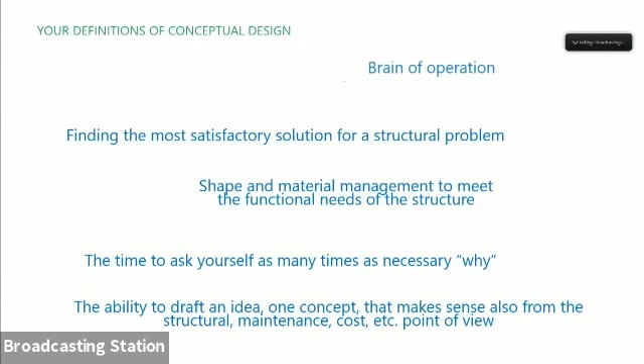Let me, on the indication of Aurelio also, talk a little bit about the definition of conceptual design. You will see here different definitions of conceptual design. When we started preparing the conference in Madrid, we had the idea to ask the possible participants for one definition of conceptual design. And we received more than 50.

They were very good, as you could see - you were not able to read them all. Now you have some of them on the screen, and they were very, very good definitions. Conceptual design is not a unique process. It's a personal process - each one has different ways to approach this process.

For that reason, we have different definitions. But if you read carefully, you'll see all the definitions use one common word: creativity. We are creative persons. We need to use our creativity to do better.

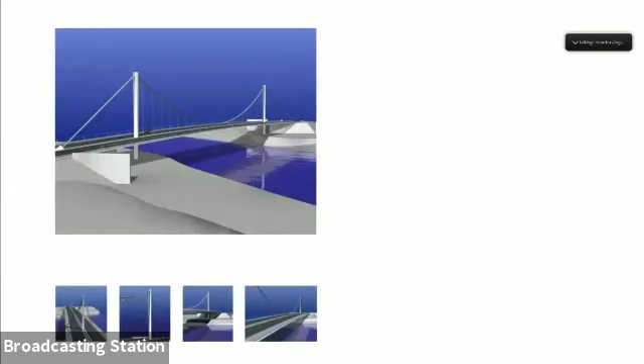So I will go through some experiences in conceptual design to see the differences you can find. At least this is my opinion. But at the same time, the common factor is always creativity and deep knowledge.

This is the easiest process when you design a bridge, because structural engineers were educated to design bridges. We like to design bridges, but I think it's a simpler process. You will see more complicated ones.

This was a competition. We lost this competition. You always have the possibility to learn from a job even when you lose the competition, and the process is always the same.

You need to collect information. You need to try to define the problem you want to solve in the best way. It is not always possible because you discover many constraints during the process of conceptual design.

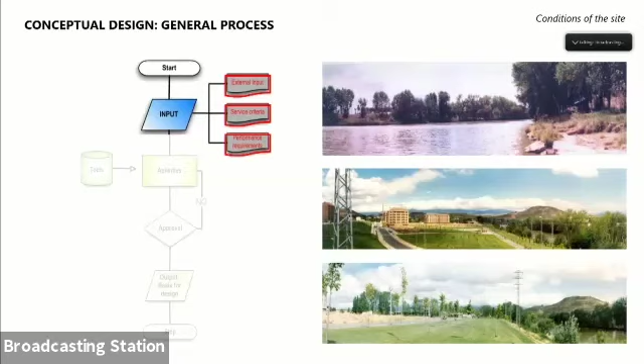You need to be flexible to collect the information you are discovering in this process. This is an important part young people many times try to do first, but first we need to understand. This is the first step of conceptual design, and it is not easy because in many occasions we don't have all the information.

Later you start a process, and in a bridge this process has fewer interactions because you need to know the constraints, but at the same time you have a lot of freedom, and you don't do that in a very compact group of people.

In this case, for example, it was very important due to the position of the river with respect to the road. It was very important to analyze the different possibilities for the abutments and the piers.

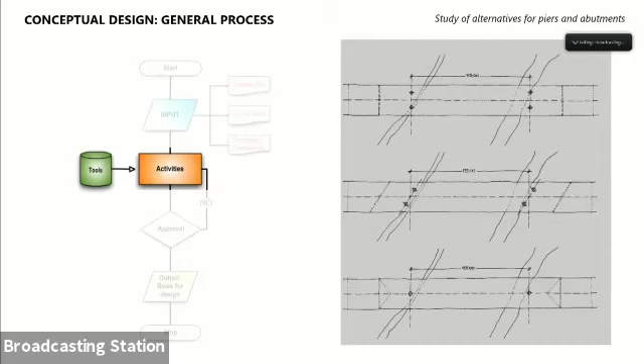And then you start making proposals. I am not going in detail, but this is a nice process because you really need to try and think every time about the integration of one problem with the previous one.

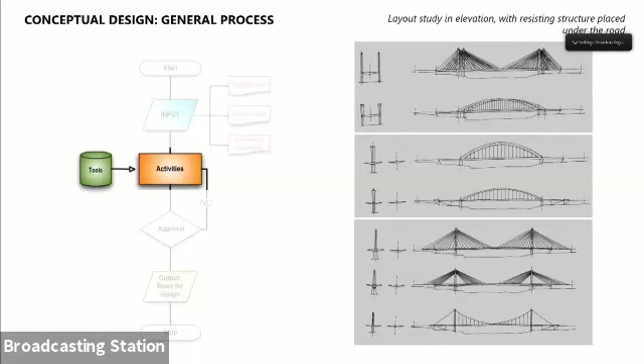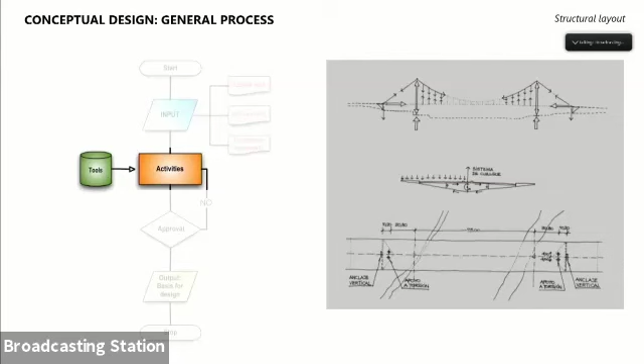It is very important to have a deep knowledge of the flow of forces for the structure you are designing, and you have to take into account the construction process also. So it's a short period in which you need to satisfy a lot of conditions.

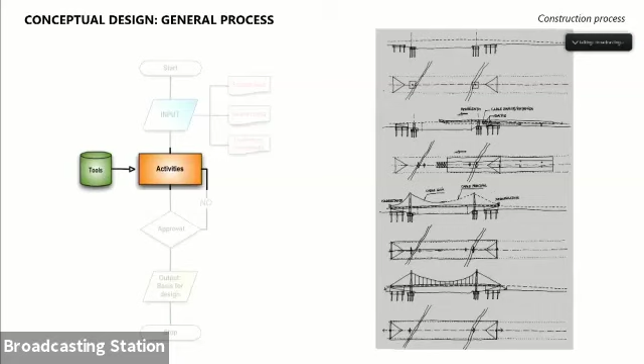At the same time you need to go back and rethink different proposals you have made in order to finally decide the proposal you are going to give. And when you arrive at that level, you start going closer to the design.

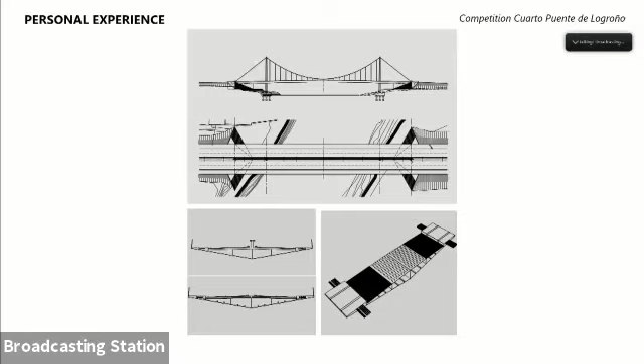You need to define details, and this is a very important part. Let me give you just one example. You see here a render we did in the intermediate stage of the process, but from this pylon to this pylon there is a big difference. With the details, with the understanding of your own proposals, you can improve a lot.

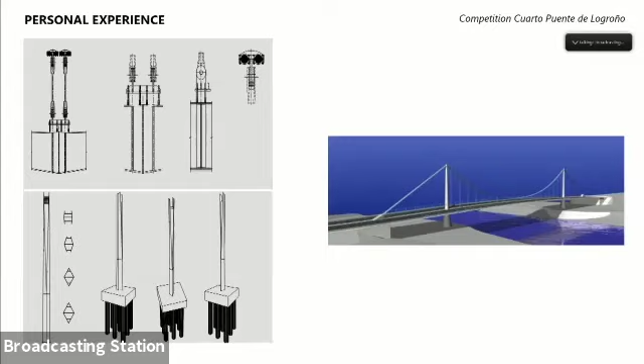This is the abutment. The abutment was a counterweight, a big huge element, and we needed to integrate that in our design. So it is very interesting to love the details, because the details are very important and you can improve a lot of your design.

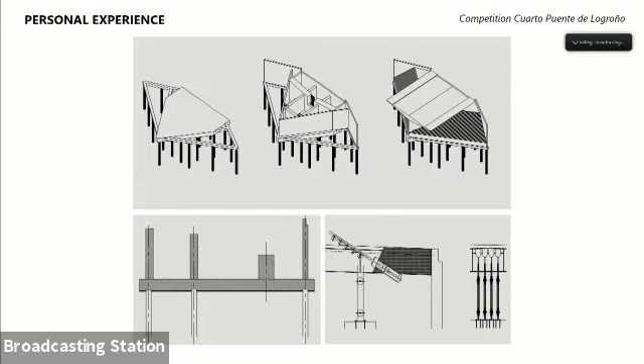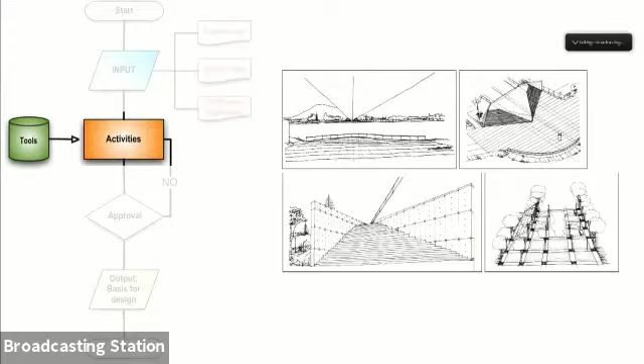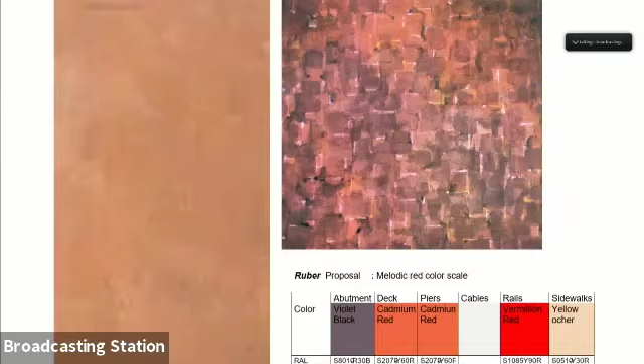And of course, the more formal details, like the use of the formwork, also the color, because it was a steel bridge and a composite bridge, and you could paint it—for that reason you need to know a lot about everything. You need to know about how to use color. You need to know many things. So this is one example.

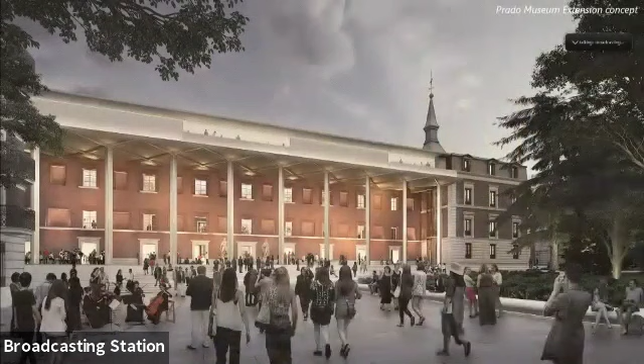Another example, completely different but very exciting also, is when you work with buildings. Buildings are much more complicated because the constraints are very strong. You don't have enough knowledge to understand other people who are collaborating with you, so you are obliged to reach that minimum level of knowledge in order to be able to discuss. This is a new effort you have to make.

This was a competition—this time an extension of the Prado Museum in Madrid. The building you see here was built in the 17th century, and we needed to maintain part of that building and then add some new elements.

Each element had to be subjected to a process of conceptual design. This competition was won by Norman Foster and another, a local Spanish architect, Carlos Rubio. He is very good also.

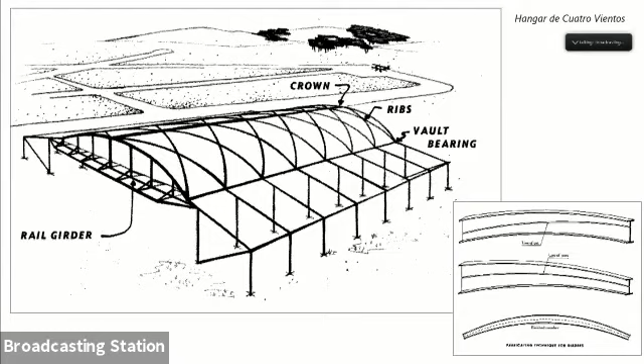The top part of the new building is an exposition area, and they wanted to make a nice roof. I immediately had the idea to show them the roof of this building, which was designed by Torroja in the 1930s, and they accepted to go in this direction, not exactly doing this, but going in this direction.

After some sketches we did, they had a very proactive attitude, because they were trying to understand what we were saying, and they were trying to check and develop some physical models. In Foster's company, they do a lot of physical models, and as you could see in this exposition, they use this very frequently, and it is very easy to make things together.

The key aspect is really to start working from the beginning. You need to start understanding the problem they have to solve and the evolution of their concepts from the beginning. We had the possibility to start working at the beginning during the competition, and then in the detailed design, and it is very interesting how we can work together.

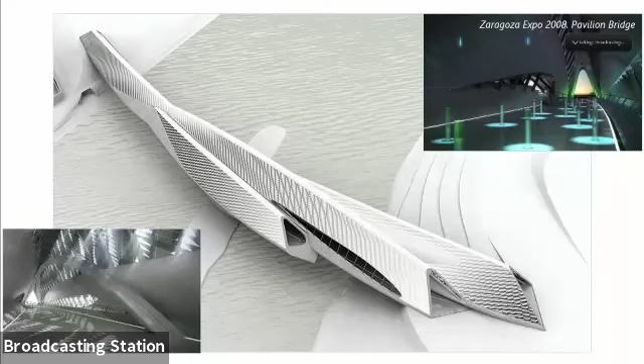In some other cases, the situation is completely different. This is a Zaha Hadid Pavilion Bridge, the main entrance to the Expo 2008 in Zaragoza, Spain, and it was won by Zaha. The definition of the geometry was this one. You can see the geometry was crazy, and all the geometry was already defined, and we needed to really find a solution to this problem.

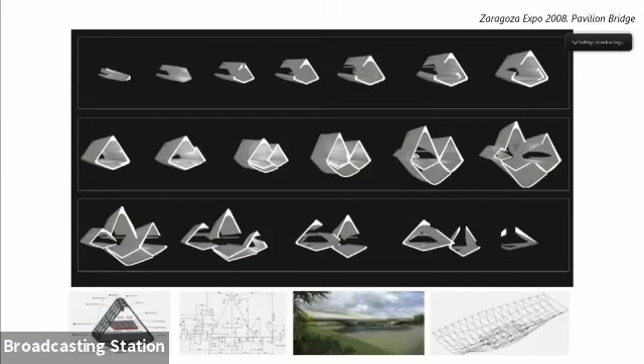It's a completely different aspect, but again, even in this situation, which is not very good, because as I said, you need to be involved from the beginning, you need to find an idea. We started working with these simple sketches, because the first idea was, well, we will use the bottom part of the bridge to support the upper part of the bridge. But unfortunately, this was not possible.

We started thinking that we could take advantage of some ribs you can see on the top, to have a top chord in tension and compression, and a bottom chord, which was the deck itself. But you see you have some windows here, and a grill in other parts of the bridge. So it was a very complex problem.

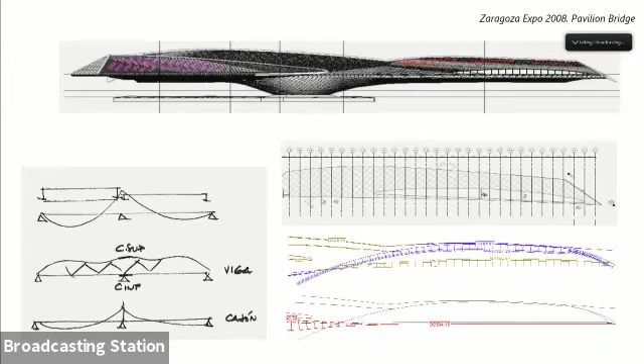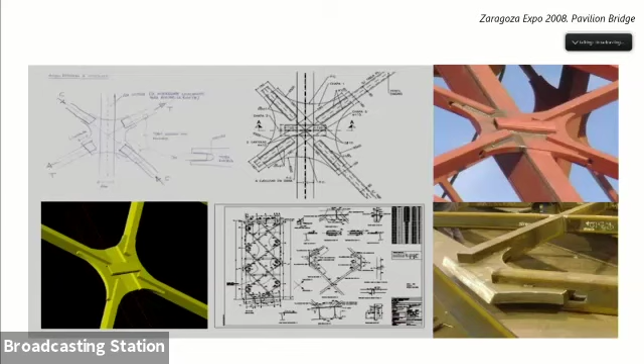I suffered a lot, but at the same time, even in these cases, which is not recommended, you really need to create a solution and imagine a good way to solve the problem. Not only at the level of the general behavior of the bridge, but also all the details. We started studying the details with small and simple sketches, then we passed to 2D, 3D, because all the nodes were different, and finally the construction. It is very interesting to know that the construction process of this bridge was very complicated, as you can imagine, but it is always a good opportunity to learn and to create things.

Final example, this is another completely different example. I love this example. This is a sculpture. The artist wanted to see the panels flying in the air, but she was very kind, because she was integrated in the team to solve that problem. But I don't want to talk about the problem itself, I want to talk about another aspect.

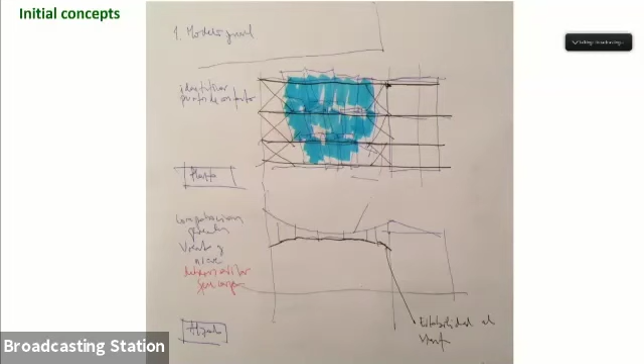It is clear that you always have to have an idea. I want to talk about which are the tools to do conceptual design. The tool is the brain, according to my opinion, because you have to have an idea. You can materialize that idea in simple sketches like this. You can make calculations, simple calculations, and you can make the first details. But at the same time, if you have young people, for that reason, I think we need to integrate our skills.

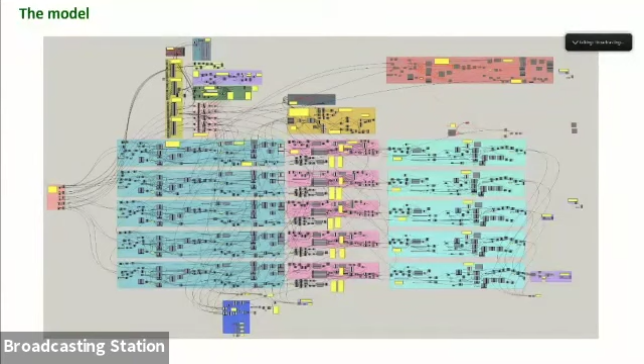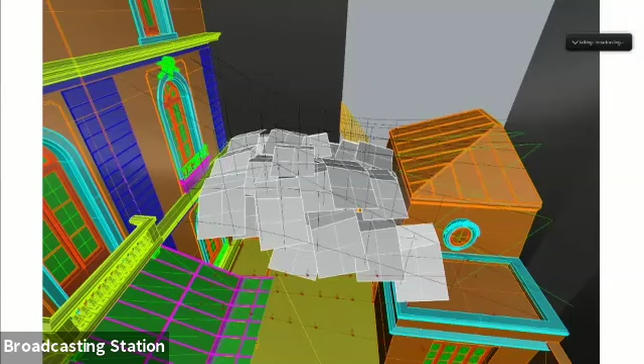He was very good, I can say. If you have people like this, you can make this incredible grasshopper model in a few hours, and then you can estimate better the forces. But don't be confused, you need an idea. We really need to create with our brain, with our knowledge, and then we can use different tools to refine our ideas. But the creativity is very important.

So at the end of the day, I think, I don't know if we need a definition of conceptual design. We need to do that, we need to promote that we have to do that. But I think one possibility is this: conceptual design is a creative process to find an idea to solve a given problem.

Inspirations are very important. You need to have a deep knowledge. You need to know the history of our structures and so on. Inspirations are very important. You need to gain experience.

Second, data collection. It is very important to solve a problem, you need really to have a good definition of the problem. If not, you are not going to solve it well. Creativity, and finally, materialization.

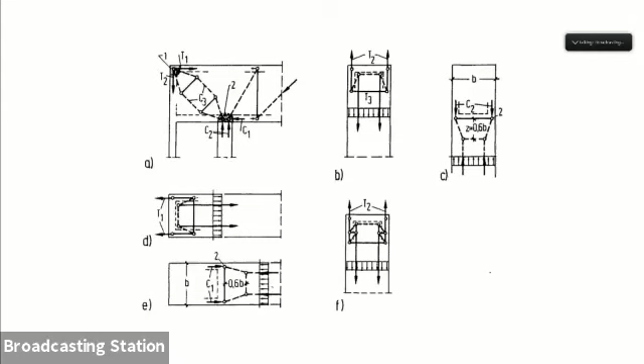He did a lot of good research, always very close to practice, I have to say. And you probably all know these figures trying to explain strut and tie models, but not only that. He was a designer. He was a real designer.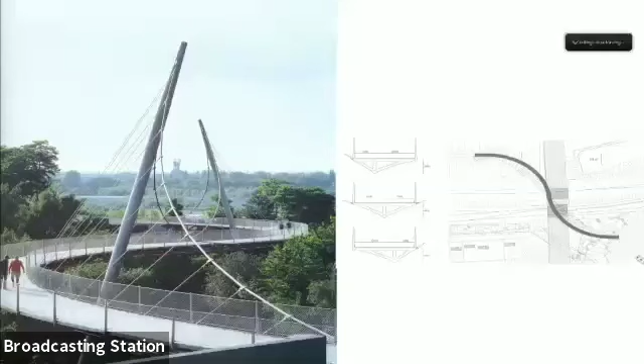After this project, he left the Leonhardt and Andra office, and he founded his own office together with Bergermann. He was famous for his pedestrian bridges, and you can read the flow of forces. He was very good, and he was a fighter.

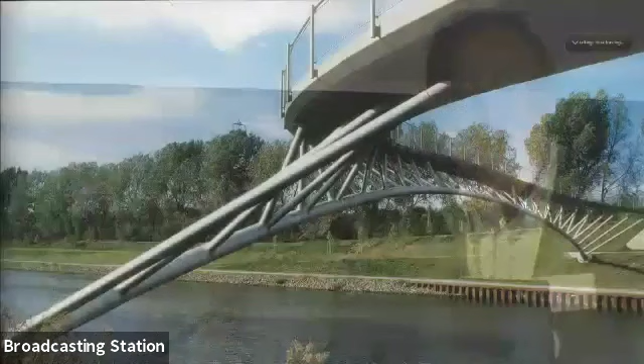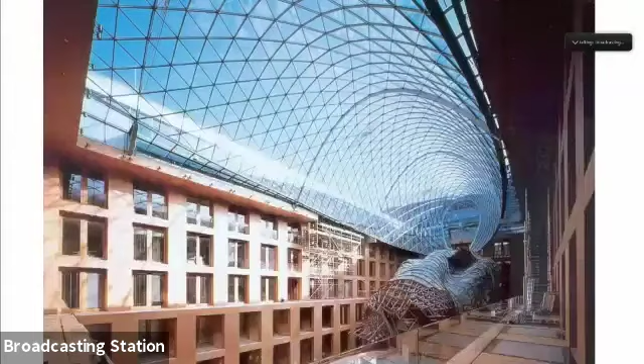And here you have a first example: in tension using cables under tension, and here using steel tubes under compression. But he worked in many other fields. He made a kind of revolution in roofs. As you can see, this is one example, but not the only one. In this case, he was working with Frank Gehry, and he was working also in solar energy.

And this is a prototype he built near Madrid. I remember one Sunday, 10 years ago or a little bit more, he was in Manzanares. Manzanares was the city which was close to this tower, and he called me.

He said, I am here more than 1 week with the German television. I am not able to obtain a crane to film the interview, so please help me. So on Sunday I started to find a crane, and finally I went to see all was working well.

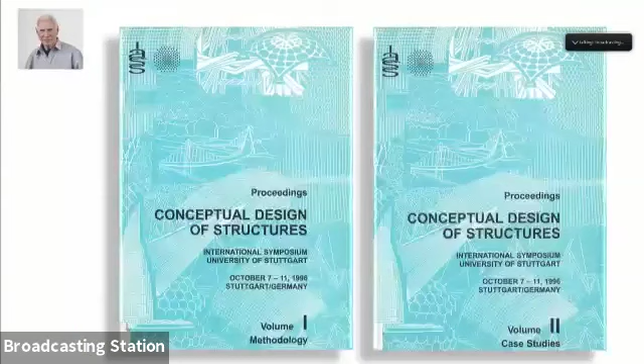And we celebrated with a good glass of wine, because this is an area in Spain where they produce very good wine. So he was very active in this area, and also he was a promoter of conceptual design.

I remember I told this in Madrid: he organized this conference in '96. I remember that he wanted to ask important designers to explain the process of conceptual design. In the last days, I was revising the document, the proceedings, and unfortunately, only a few followed this recommendation, because it is not easy to really explain what you do when you do conceptual design. Many of them, like we normally do, explain their own projects, but he was a real inspirator of this process.

And it was an inspiration for many generations, also for me. Thank you, Jörg, really. Rest in peace.

Finally, I would like to reinforce a few ideas. You always have the possibility to create. Don't waste this opportunity. You always have the possibility to enjoy creating, and this is very important. When you start creating, you will never stop. You need to start, really, and be ambitious, to have the energy to fight and to work hard, because working hard is a great condition when you want to do a good conceptual design.